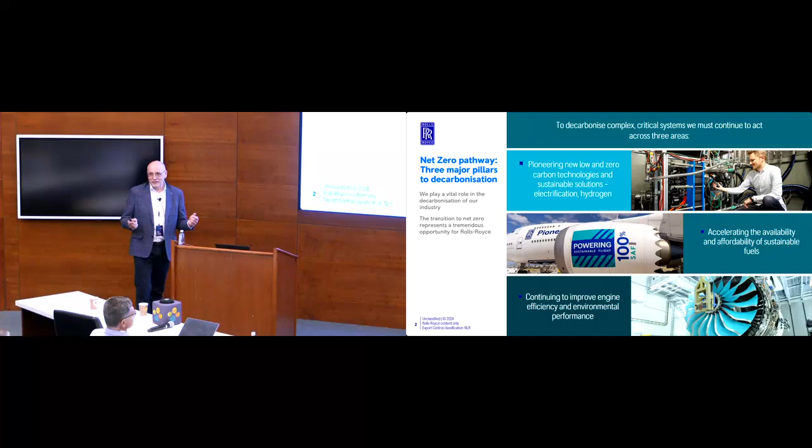First, one slide of introduction about our company's strategy to reduce CO2 imprint. It consists of three pillars. One is looking at alternative fuels, something different from liquid fuel - that can be electrification or hydrogen, which is what we'll talk about today. The second is about accelerating the availability and affordability of SAF, sustainable aviation fuels, which are very similar to kerosene but in the end have no CO2 imprint, or little. And the third, which is actually one of the important ones, is continuing to improve the efficiency of current engines. As somebody said, the best thing to reduce impact on the environment is not to burn the fuel. So that's also one key thing we continue to do.

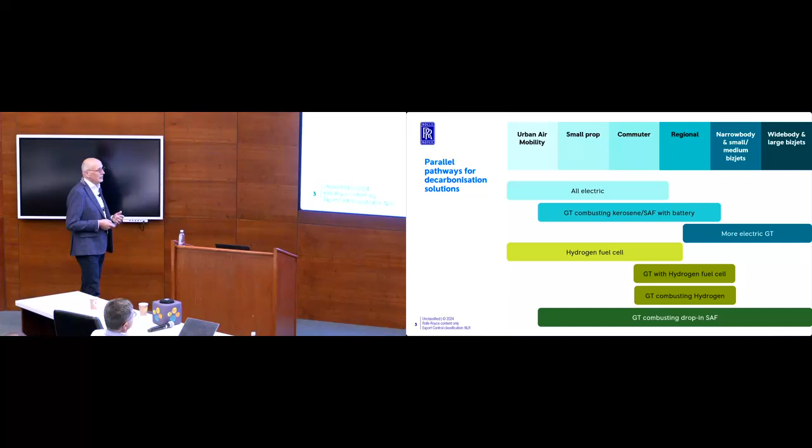The second slide gives a bit of introduction on where we can do what. There are different alternatives to get away from kerosene. You can do electric, but in the end that's only possible for relatively small airplanes - if you go to regional airplanes, it's not possible anymore. For regional and narrow body, small to medium engines, that's where we work in Germany, looking at SAFs and also hydrogen. You also see hydrogen fuel cells, which we're following and doing some research on for a long time, but this is being considered for relatively small airplanes because of weight and size. For the very large wide body airplanes, maybe you can do something more electric, but the key thing we're looking at there is SAFs.

On hydrogen, there's of course a big push from government. We have four big projects working on hydrogen, funded by national and European funding. The first one, where we started in Germany, is called Wotan. We also have a UK program called HYEST, where we develop hydrogen technology. Then we have two European projects - one is called Hestia, where we work in cooperation with many partners within Europe on developing technology and fundamental research for hydrogen. And another European one, which is actually the biggest, is called Cavendish.

I will quickly go through all the projects, what we do and where, and then we'll come to more details about what we have done.

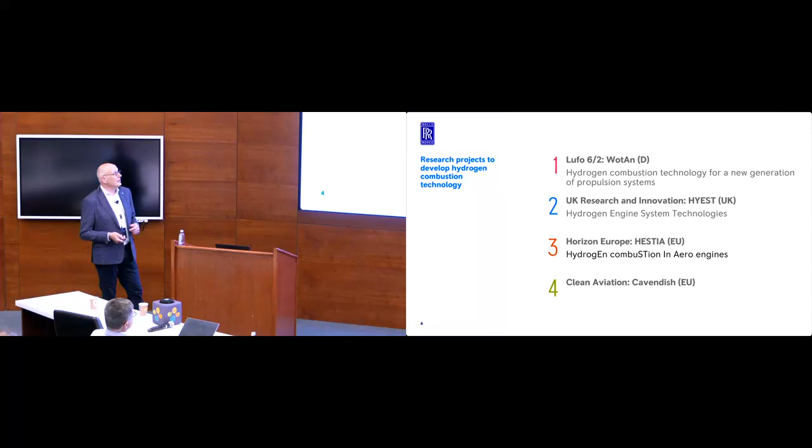The Wotan German project, there are a few things we do there. We look at fundamental things, like with universities, further developing CFD methods for hydrogen specifically. But also developing hydrogen injectors, and you see two examples here in the pictures which we developed, manufactured, and finally tested. The testing consists of two things.

It has been mentioned before, but we distinguish between low and high TRL. TRL stands for technology readiness level, and it's divided into certain classes. If we reach TRL 6, then we can try it in an engine, first on ground and then fly.

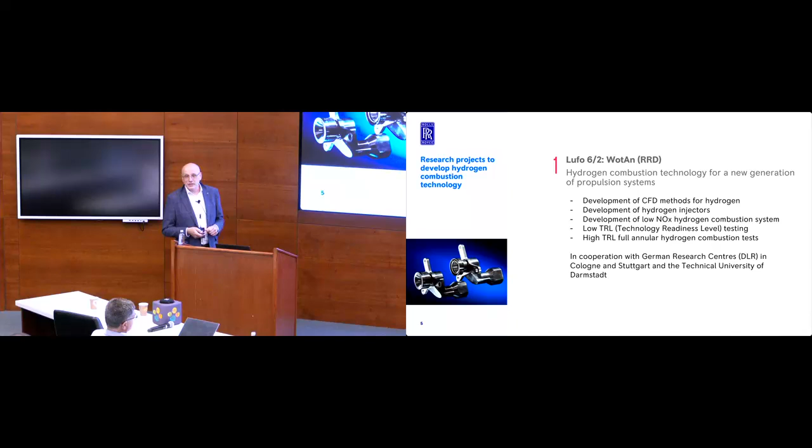So low TRL is where you look at a single injector in a test rig and see how it performs. This is, of course, in cooperation with partners, with DLR the German Research Center, and also with the Technical University in Darmstadt. The HYEST program is doing similar things, but looking at a bit more novel injector concepts.

With preheater I mean that if you have a tank with liquid hydrogen, we don't burn it liquid, we don't bring it liquid to the engine. It will be preheated first and supplied gaseous to the combustion chamber, so that's what we need a preheater for. We also do experimental work, in cooperation with Loughborough, which does a lot of experimental work, as well as Cranfield, Cambridge, and Swansea.

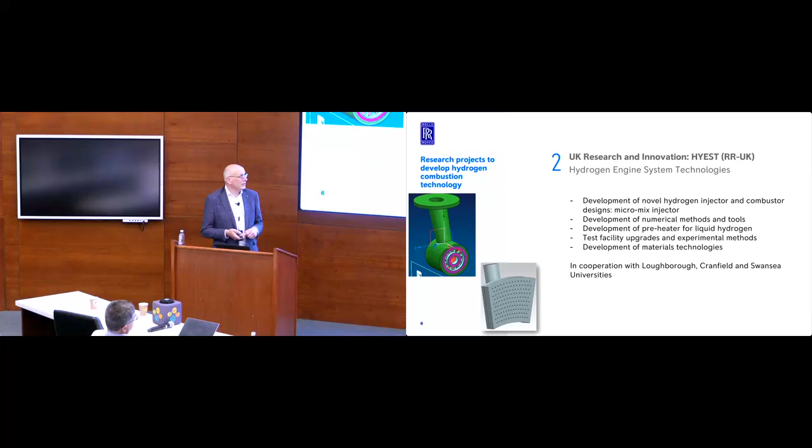And in this project we also look at, as many people know, the Hylon burner. That's good because you have experimental data, you can compare your CFD results against it, and get an idea of how good you are.

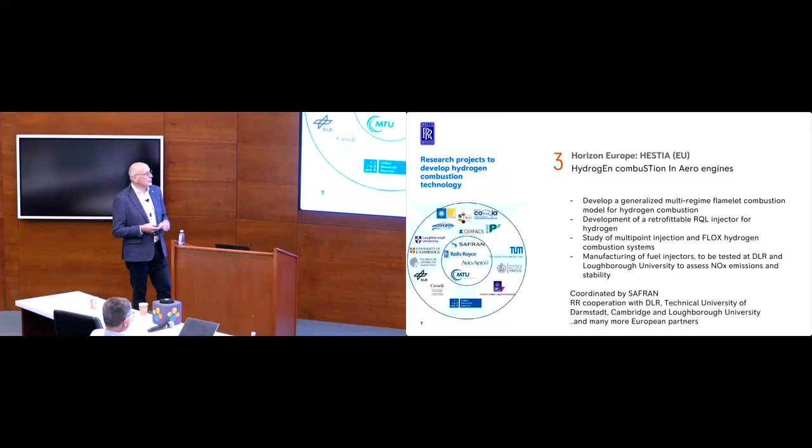But we also do some development on injectors, RQL ones - I'll come back to what that means - and also on multi-point micromix injectors. We will manufacture them and test them as well.

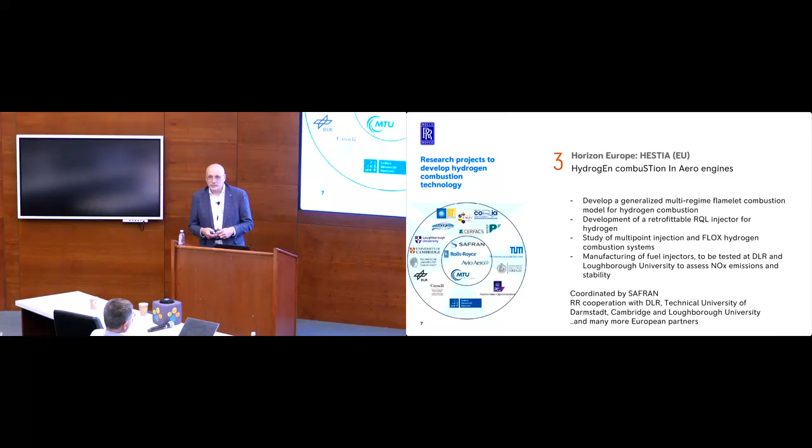This project is actually being coordinated by Safran, and there are many other partners included. Then the last project is called Cavendish. Actually, it's named after a French guy who moved to the UK and discovered hydrogen, so that's the reason it's called that.

Here we will look at performing a test, an engine test - that's the ultimate goal, to do an engine test on hydrogen. We decided on a retrofit concept because that has the lowest risk, and it's achievable since it's only a 4-year program.

We also decided that a Pearl engine, on the left-hand side, will be the donor engine. This will be the engine where we convert the combustor to hydrogen. Of course it's all linked to the other programs where we look in more detail at injector development, and here we go to higher TRL levels, up to TRL 6. In the end, we will do an engine test in this program.

And actually it's much more than that. We will go up to an engine test within Rolls-Royce, but we also have other partners looking at tanks and fuel systems, and at how you integrate the engine into the aircraft. There are also engine manufacturers and aircraft manufacturers involved. We also develop concepts for the route to fly, how in the end you can introduce it into service, and how you negotiate with governments and all the regulations.

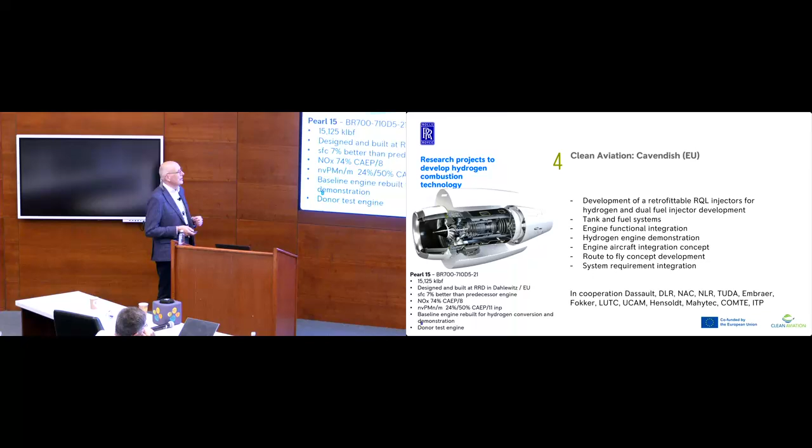So now going a little bit deeper into how we developed the technology, this is one of the initial phases. We looked at different concepts.

If you look, you'll see slices from an existing combustion chamber from a Pearl engine. On top you see an injector which is retrofittable, so you don't change the combustor, only exchange the injector. As you go down, the possible reduction in NOx will increase, but also the complexity of the system will increase. The simplest thing you can do, which is where we start, is just exchange the injector and leave everything else the same. It's called RQL, because it's a rich-quench-lean system.

So in the primary zone, it's rich - where it's red means high temperature. That's the primary zone, it's very rich, and then additional air is injected and you quench as quickly as possible. In the end, a gas turbine always operates on lean conditions, otherwise it would get too hot.

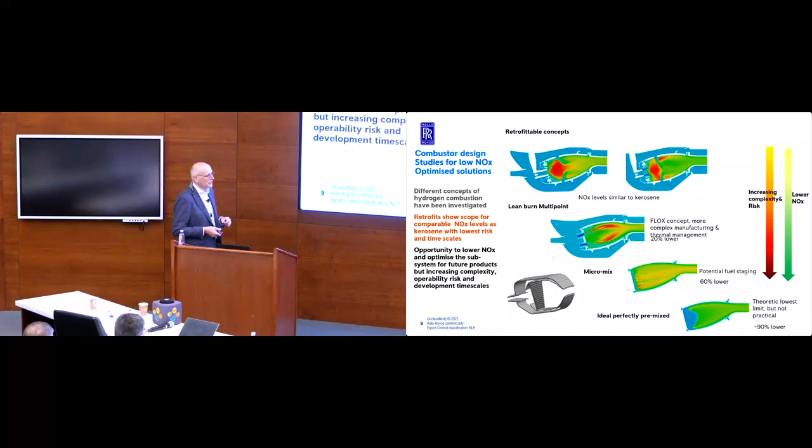If you go one step further, you go to micro mixers, where you inject hydrogen via a lot of holes and air around it, and it gets complicated to manufacture. But from our assessment, you get about 60% lower emissions. The bottom one is a pure numerical case, where everything is perfectly premixed - that's the ultimate lowest emissions you get, about a factor of 10 lower than what we currently have.

But what I show here is what we started with, to bring it up to maturity - we chose to start with the RQL concept, the top one, just changing the injector and not the combustor, because that's the lowest risk. From the studies we did initially, we expected to get similar NOx emissions.

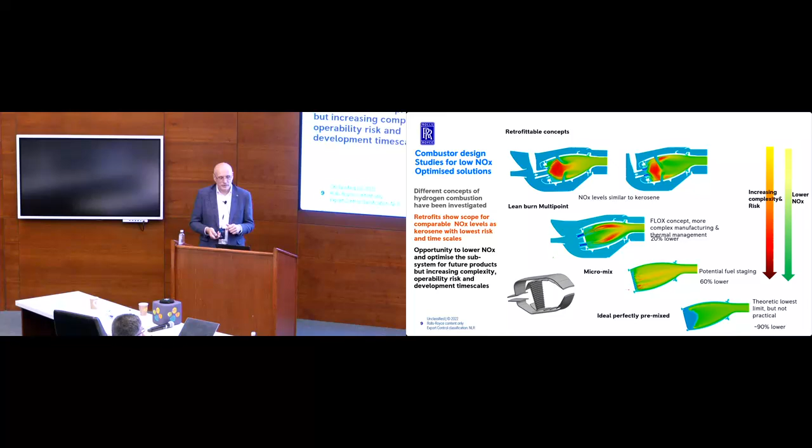So the injector development is what we did. We started this from day one, using CFD as much as possible, and looked at different concepts. We looked at literature, what people did before, and tried to do things which are similar.

On the left-hand side, again, a picture of how the combustor looks. To do CFD, you first have to create a CAD model and geometry, then run CFD. One thing we did to compare NOx emissions with kerosene is choose the AFRs, the air-fuel ratio for hydrogen, such that we get the same exit temperature of the combustor. In real life, an engine will operate slightly differently, but this is actually a pessimistic view - because of the thermal properties of hydrogen and the CPs, you can run slightly leaner with hydrogen. So assuming the same temperature is a fair and good assumption.

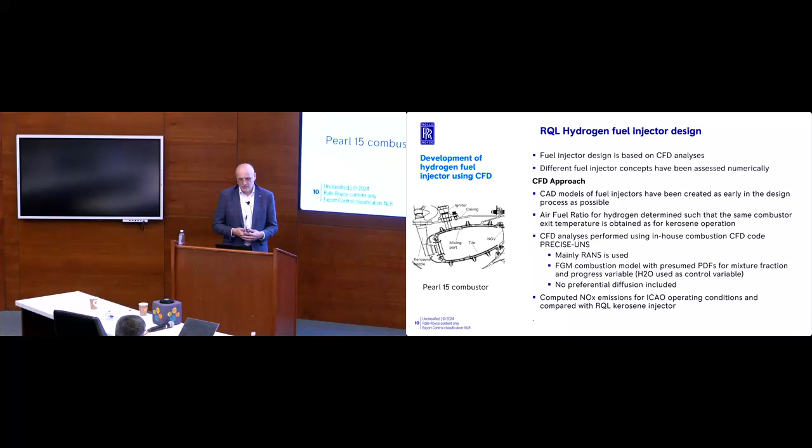We did a lot of CFD with our own in-house code. Initially we didn't make a lot of changes, almost nothing. Most of the CFD calculations we did are based on RANS because it's quick - you can do 4 or 5 geometries in a day. With FGM, flamelet-generated manifolds, used as the combustion model, we only had minor changes needed for hydrogen. We don't have preferential diffusion included, which is something we've investigated in one of the research projects, to see how we can incorporate it and what impact it has on the results.

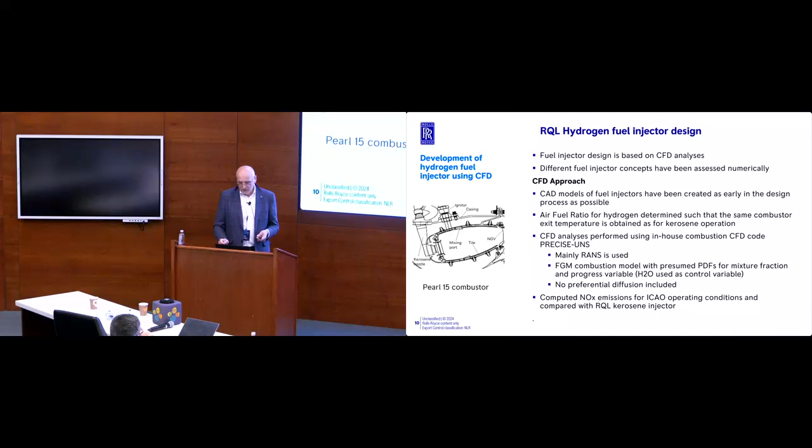When we started this project, we had two main concerns. One was whether NOx could be comparable, or whether it would be higher. Some people estimated NOx would be twice as high. The second concern was thermoacoustic instabilities, which I'll come back to later.

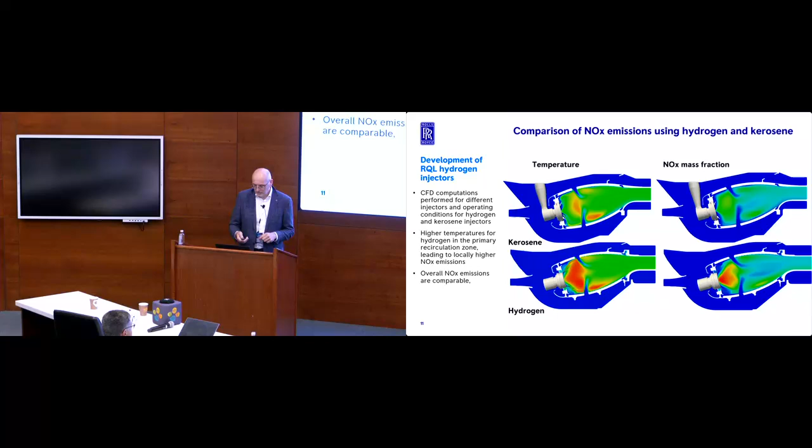It's very difficult to predict this with CFD, especially looking at a lot of different configurations. So as one example, our CFD prediction showed that emissions with regard to NOx should be comparable.

Very interestingly, and something we only did recently, is to look at NOx emissions by putting a plane through the combustor at different axial positions and integrating NOx in grams per second. If you compare hydrogen with kerosene, you get very similar results. Actually, at the end, the hydrogen is slightly lower than the kerosene.

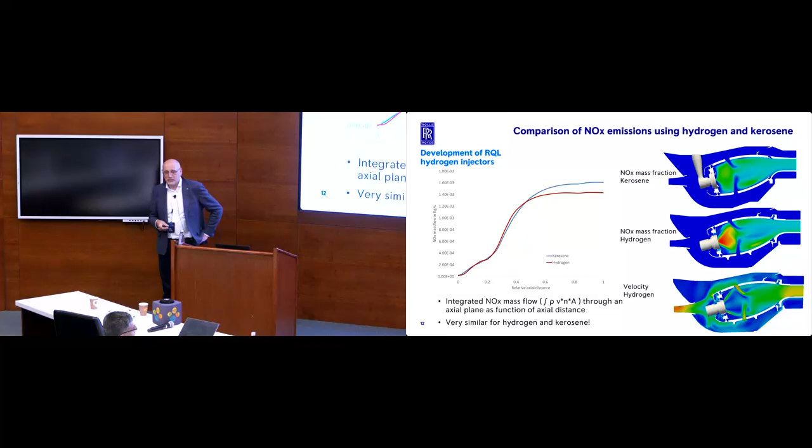Even after all these years, if you look at these pictures, your eye is attracted to the hot blob, and if you try to integrate by eye, it always goes wrong. So if you numerically integrate, that's much safer.

The reason is that you have a high peak value of NOx, but that's in the recirculation zone, so finally it doesn't contribute much mass to what goes to the exit.

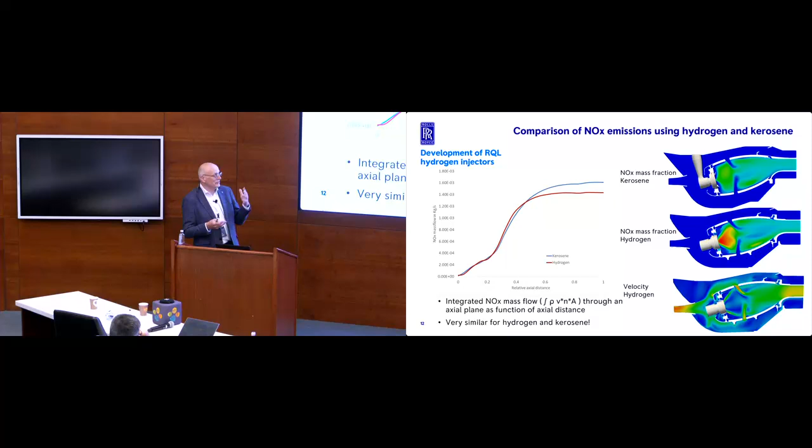Jumping a bit ahead, we always overpredict NOx emissions when modeling a combustor on kerosene. We also do on hydrogen, but the overprediction on hydrogen is not as much as on kerosene. That's something we don't understand yet. That's why, in the end, the emissions are very similar, but numerically we end up with slightly less NOx emissions at this condition.

Most of our CFD predictions were based on RANS, and of course you ask the question, especially in this community, is RANS good enough? If you look at local effects, it's not.

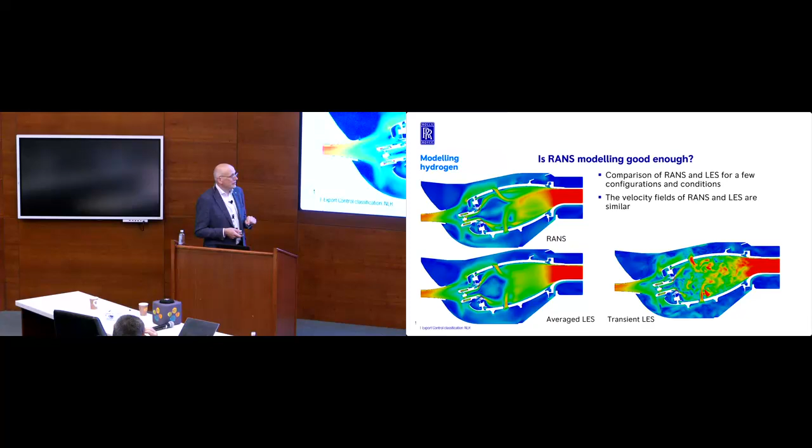So we also looked at LES for a few limited operating conditions and a few limited injectors. On the left-hand side here you see the velocities, and of course the local changes can be high, but overall, the shape and what's happening is very similar. If you look at the instantaneous picture on the right-hand side, that's very different.

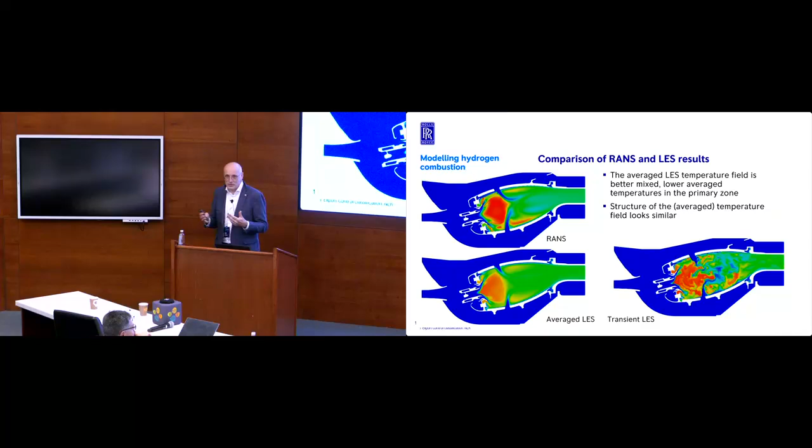So that was the velocity. If you look at the temperature, it's a similar picture—locally different, and of course the mixing is different, much better predicted in LES. But the global picture of what's happening in the zone and what comes out at the exit, which interests us most, is comparable. There aren't really different trends in what we're seeing.

Here's the final picture on NOx, where the differences are even bigger. But again, if you look at what's happening at the exit, it's not that much.

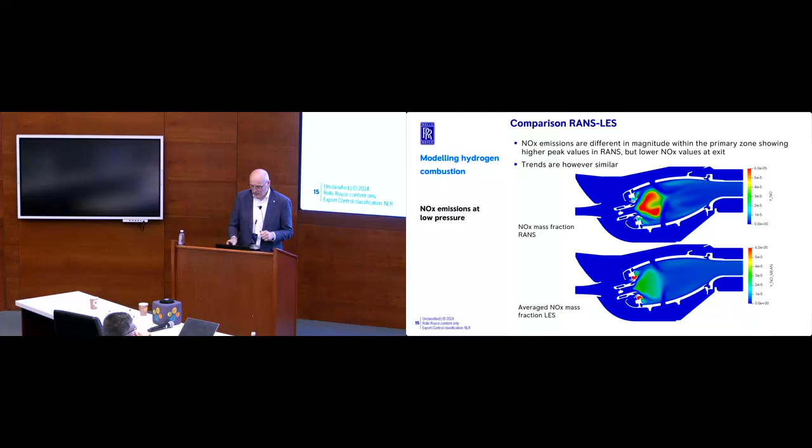The other thing to look at, since we're using the FGM model where we can also evaluate the reaction progress: if you look at what's happening in the combustor, everybody knows hydrogen burns quickly, but it burns very quickly. And we have higher temperatures in our combustor, plus high pressure, so the reaction zone is very, very small.

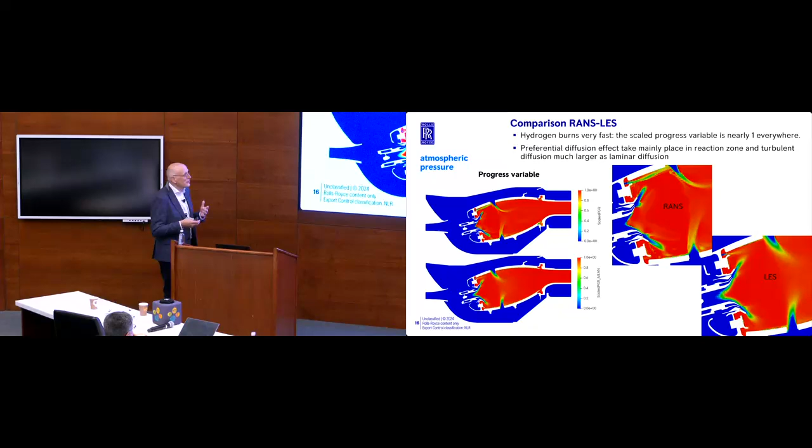Something to look at in more detail is that I believe preferential diffusion locally has a big effect, but only in the flame front, which is very small. That's probably why RANS is still doing a reasonable job for this.

You have preferential diffusion, which is important and can make a big local change, but the reaction zone is very, very small. Also, turbulent diffusion is much bigger than the laminar preferential diffusion.

Nevertheless, as I showed, we have a lot of research projects where we, in cooperation with universities, are looking to improve our model capabilities, and that's ongoing. But this goes in parallel with the technology development, and you use what you have at that moment. You don't want to wait four years before you have a more advanced model to use.

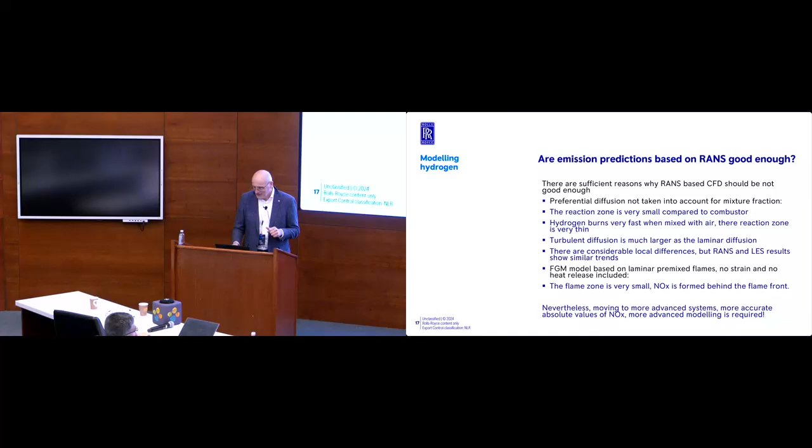We don't premix, but at the time the air and hydrogen meet, they mix, and then you can start to burn. So therefore, no swirl, to have high velocities. There are also some theories about thermoacoustics being coupled to the vortices which are generated and precessing vortex cores, so we also wanted to assess whether it really is like that in reality.

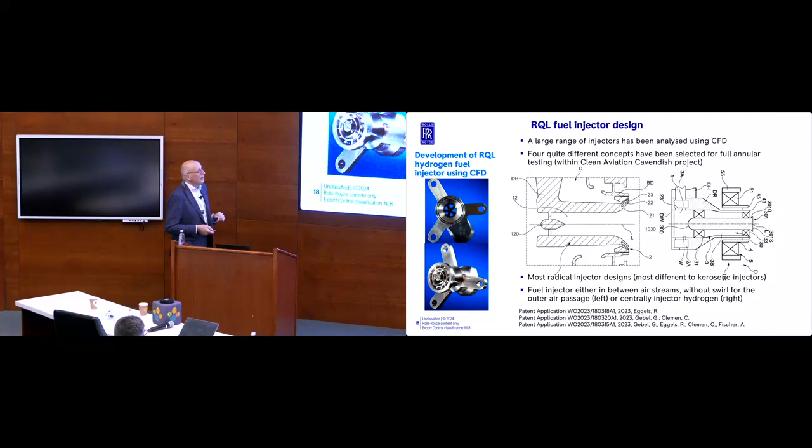The other concept, shown in detail on the right-hand side, has a bluff body, but in the center, hydrogen is injected centrally, and then air is around it. So in the end you create a very rich primary zone, even richer. The advantage of that is that you keep the hydrogen away from the walls.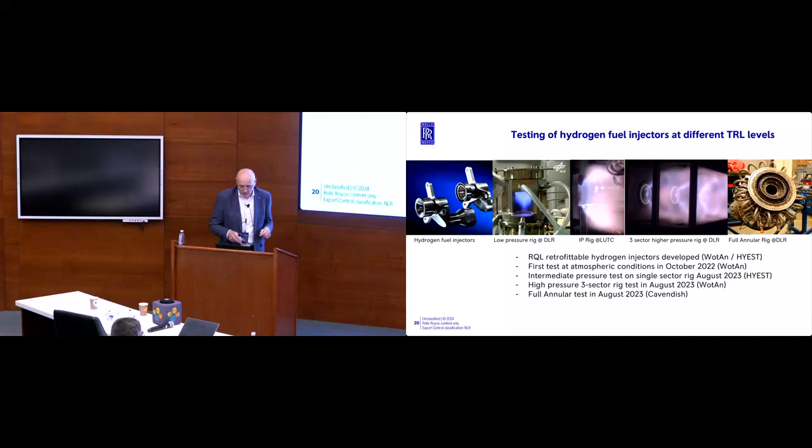I'll jump through this a bit so I can get to the results. This is results of the two injectors I showed before, in a sector which has three injectors, and in principle we went to realistic operating conditions to be sure before we moved to the full combustor test. And actually, all of these injector concepts worked without any issues.

It worked well. Then we went to the very big test, where you see on the right-hand side the test rig. In the middle you see the entire combustion system, with these very big pipes for hydrogen, and this is the entire ring of the combustor.

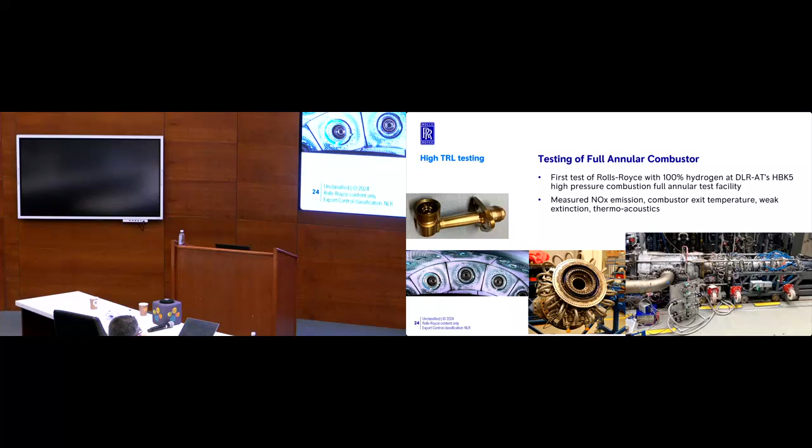And a close-up of a fuel injector and how it looks like. So I'm just going back.

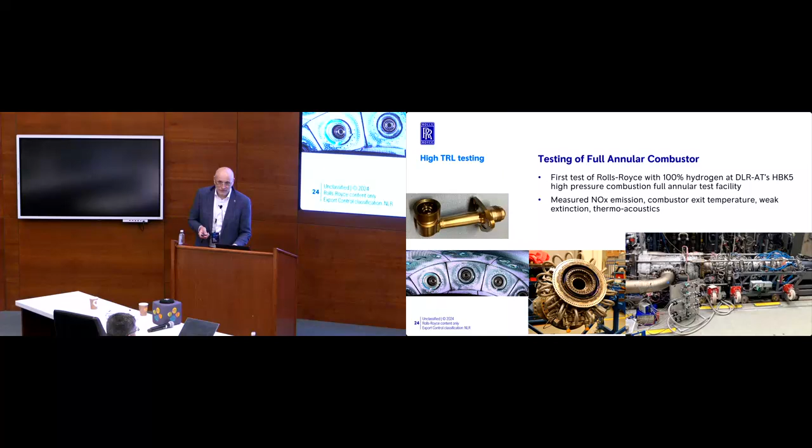So going back, what we did was measure the NOx emissions. That's one of the things which is very important for us, to get combustor exit temperatures. We also did a separate test for thermoacoustics. In the end, we did two test campaigns over two to three days, and we burned five tons of hydrogen, which at that time was about half of the produced green hydrogen in Germany in a week. And five tons is the maximum DLR could actually store at that time.

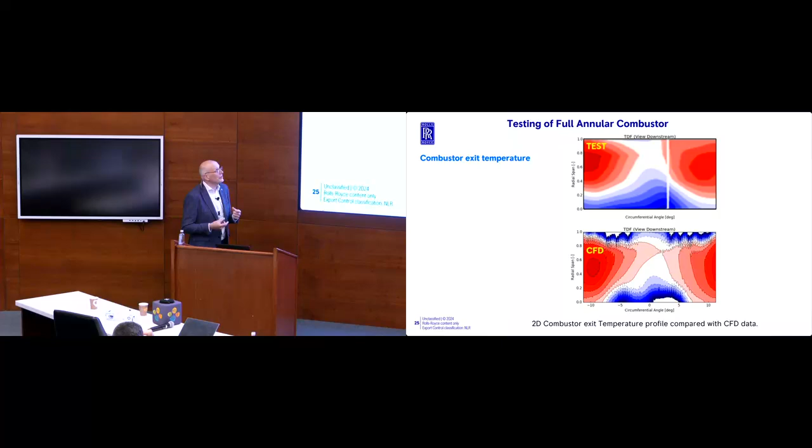So you see a result of the combustor exit temperature. We don't measure the temperature directly, we measure the water content, and from that we calculate the temperature back from equilibrium. The top one is the test, and the bottom one is CFD. You see the pattern looks very similar.

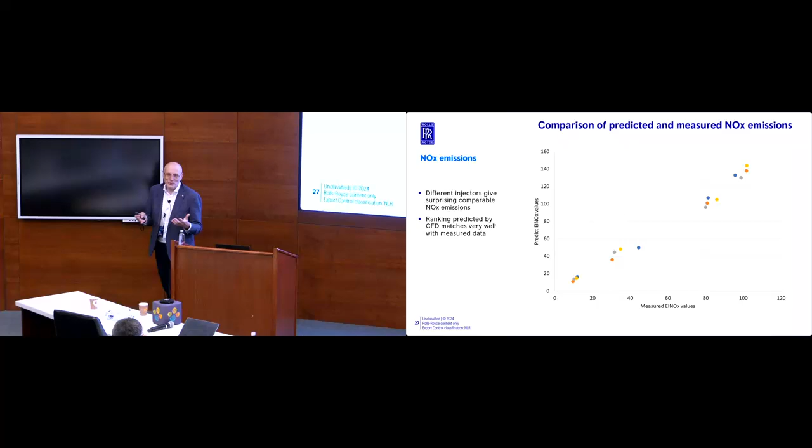Because initially there were a lot of discussions about whether we'd really see similar emissions for kerosene and for hydrogen, and that was not clear. Another thing you can see is what I said: if you look at the measured emissions at 100, you end up at 140 for CFD. So we always overpredict NOx emissions in CFD, and for kerosene it's even more.

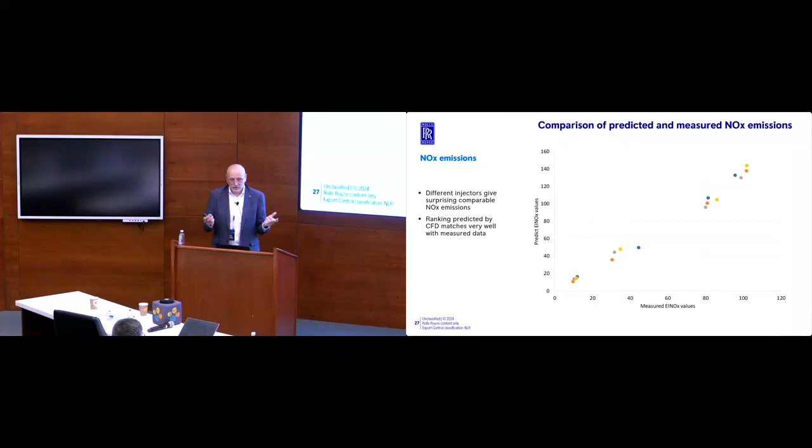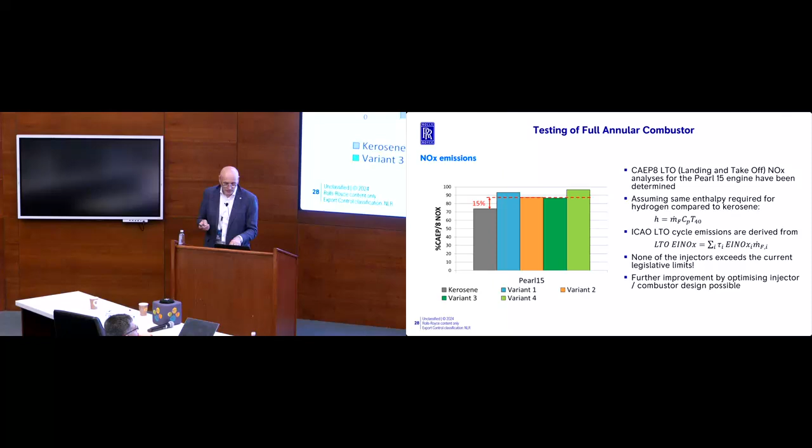That's something you didn't expect. The next one is, we were very afraid about thermoacoustics, and we didn't have any problems with thermoacoustics either, which we didn't expect.

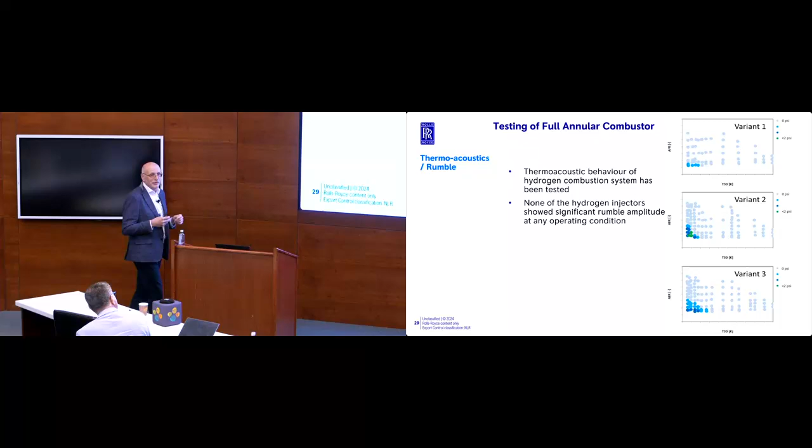One thing that's very interesting for me is, as I said before, I developed one injector which didn't have any swirl in the outer part. The idea was to reduce thermoacoustic instabilities, and that's variant number one. We still don't fully know why it works, but it's at least the quietest one.

So the final slide is a summary. We started a journey to develop technology for hydrogen a couple of years ago, and we looked at different concepts, tested them at different low and high TRLs. We are very happy with our results because we expected a lot of problems. We looked at different concepts because we said definitely one of two or three will fail, but actually all of them worked.

So one of the next steps will be that we do another full annular test by the end of this month, and then next year we will run an engine on the ground on hydrogen. Okay, so.

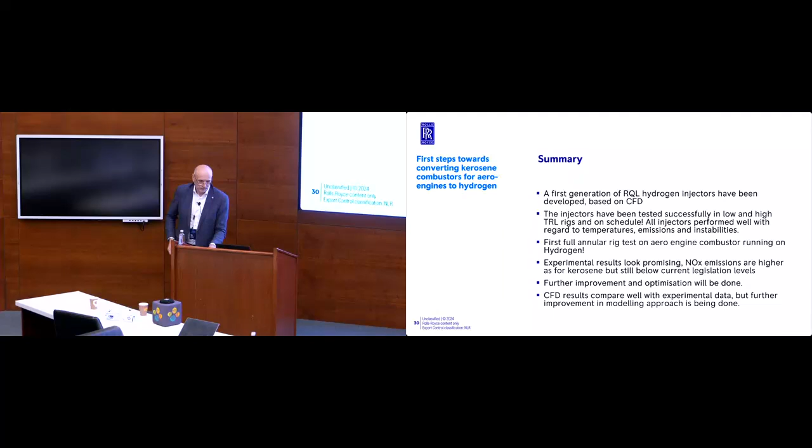Thank you for the wonderful talk. I have a very short question. When you said the predicted data, you mean the data from calculation, right? Have you considered changing chemistry? Because the NOx can be related to that, no?

We looked at different reaction mechanisms. In the end, I'm using the same mechanism for kerosene as for hydrogen. It's a mechanism developed by Warnatz, who started from hydrogen and extended it. We also looked at San Diego, which gives similar results. GRI gives completely different results, so don't use that for hydrogen.

Did you do the annular combustion at high pressure or at atmospheric pressure in the test? No, that's at high pressure. We didn't go to the full pressure yet, we went to 13 bar. But the test we will do this month, we will go to 30 bar.

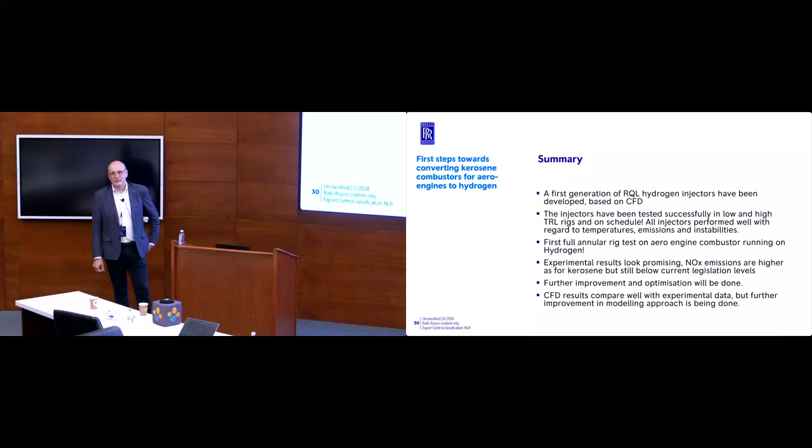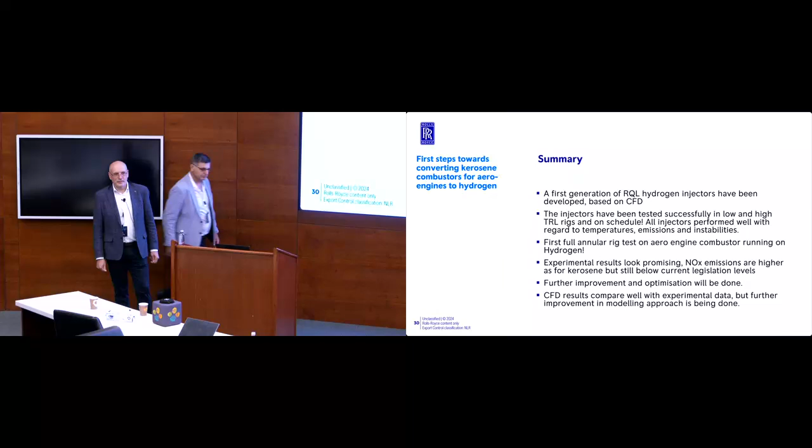I had a similar question on NOx, but it was partially addressed, we can talk about that later. You also mentioned the micro mix injector, and you say up to 60% reduction in NOx. What is the drawback? Is it just that the manufacturing is more complex, so you expect more issues with that injection? Yeah, the manufacturing is more complex, and you also have a lot of thermal problems because the hydrogen is cold and the air is hot. In the end, our choice of injector was made because of the one with the least thermal stresses.

Thank you for the presentation. It's interesting that NOx isn't significantly increased, that's a good takeaway. Have you looked at, or do you have plans for looking at the other main pollutant, water, specifically in the form of contrails? Is that something that can even be done computationally, for example? Yes, but you can also do it on a piece of paper. You know the air fuel ratio, so you know how much water comes out, but whether or not it forms a contrail is different.

Yeah, but from the combustion chamber, there's no contrail, it's only from further downstream. From the combustor concept, it's easy because you only have water vapor, which is hot, and even from the engine it's hot. But there are some research projects where we work together with people who look at what happens in the atmosphere and contrails, because in the end it's a big thing, and it's not clear what's better overall, whether hydrogen or kerosene. Also for kerosene you have contrails because you have particles from the soot which then form contrails, and with hydrogen you don't have that. So in the end, it's unclear what impact it will have.